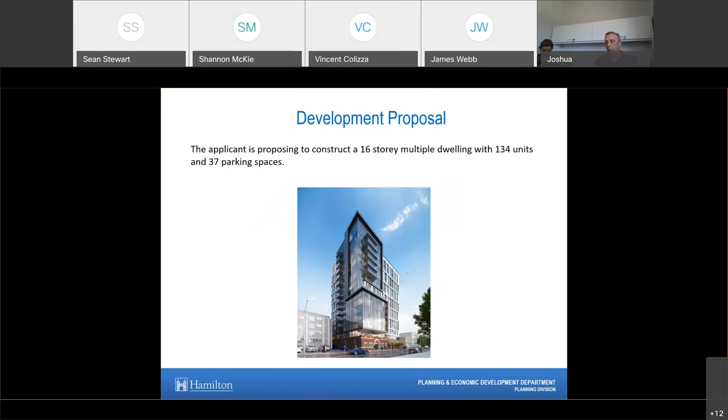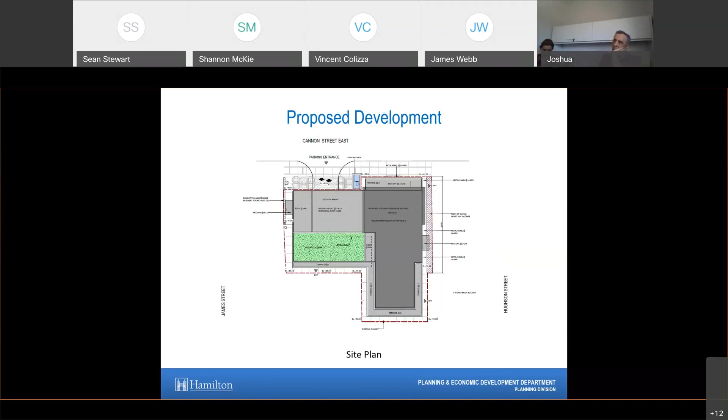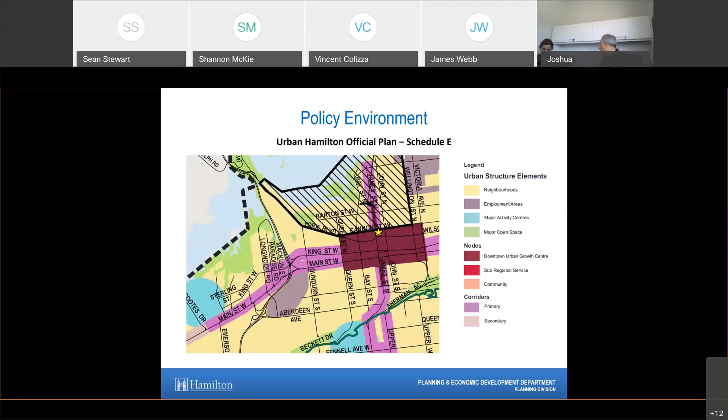Policy environment: on Schedule E of the Urban Hamilton Official Plan, the property is located within the Downtown Urban Growth Center. On Schedule E1, it's located within the Downtown Mixed Use Area. Some major policy themes: the Downtown Urban Growth Center shall be the preeminent node in Hamilton due to its scale, density, range of uses, function, and identity.

It shall be planned for a range of uses appropriate to its role as the city's preeminent node. It shall function as a residential neighborhood with a large and diverse population and a range of housing types. In the downtown mixed-use area, it shall serve as the central focus for the city by creating a sense of place. A higher density form of housing shall be encouraged that may be integrated with business uses, including retail and service commercial establishments on the ground floor.

Some key urban design policies: respecting existing character, development patterns, built form, and landscapes; promoting quality design consistent with the locale and surrounding environment; contributing to the character and ambience of the community through appropriate design of streetscapes and amenity areas; massing development to respect existing and planned street proportions; designing new development to minimize impact on neighboring buildings; and creating a comfortable pedestrian environment.

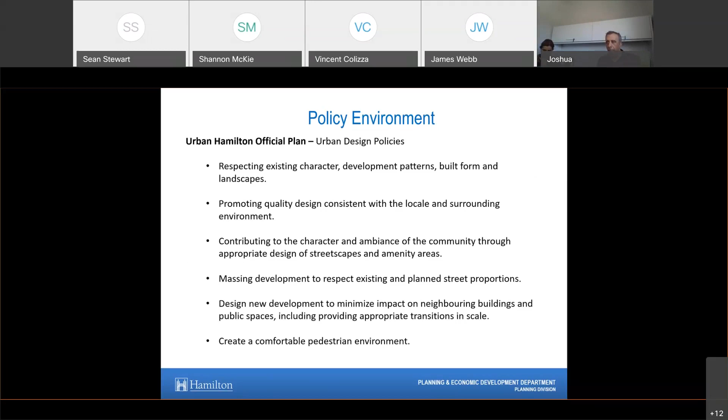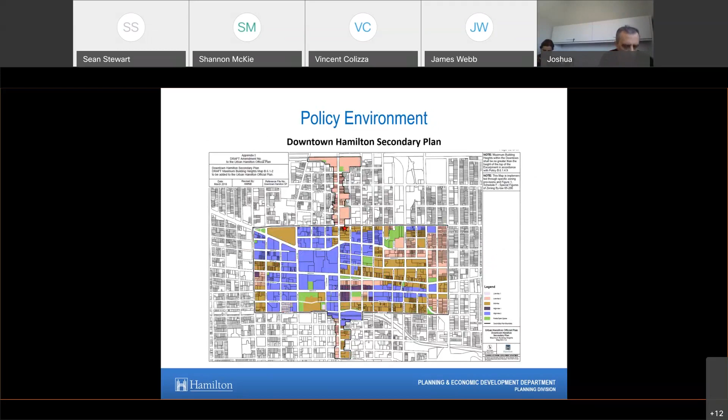The property is also located within the Downtown Hamilton Secondary Plan, within the Downtown Mixed Use designation, and it's also within the mid-rise category. Some major policy themes here: the downtown mixed use supports intensive urban scale mixed use development. Mid-rise buildings include anything greater than 6 stories, but not greater than 12 stories in height.

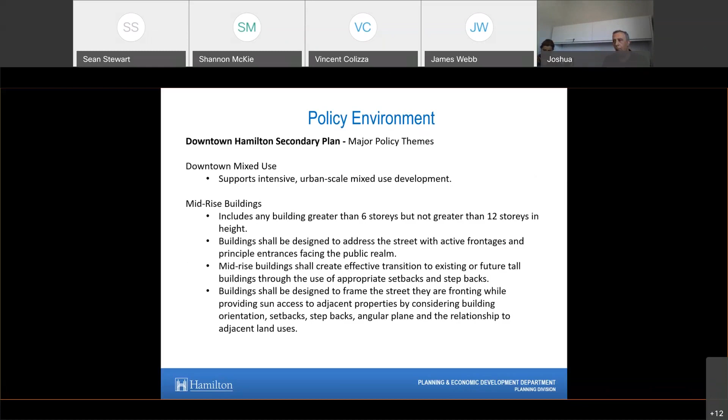Buildings shall be designed to address the street with active frontages and principal entrances facing the public realm. Mid-rise buildings shall create effective transition to existing or future tall buildings through the use of appropriate setbacks and stepbacks. And buildings shall be designed to frame the street they are fronting while providing sun access to adjacent properties, through considering building orientation, stepbacks, angular plane, and the relationship to adjacent land uses.

Some key urban design themes: development shall provide for transition and scale through a variety of design methods, including angular planes, location and orientation of buildings, and setbacks and stepbacks of building mass. Development shall allow for a minimum of 3 hours of sun coverage between 10 a.m. and 4 p.m., as measured on March 21st and September 21st, on public sidewalks and other amenity areas.

New development shall be compatible with on-site and adjacent cultural heritage resources. Adaptive reuse will be given priority for all built heritage resources. And all development shall be massed to frame streets in a way that respects adjacent street proportions.

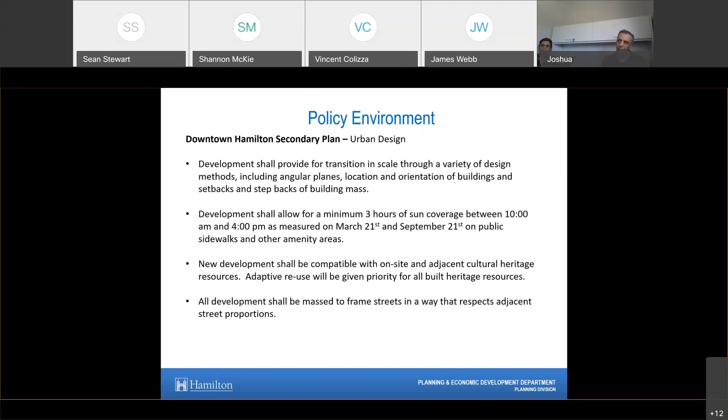Some regulations to note: maximum building height 44 meters, maximum lot coverage 85%, building base facade height 22 meters along Cannon Street East, minimum 3 meter step back above the building base facade height, and a minimum 3 meter step back for any portion of the building exceeding 22 meters from any side or rear lot line.

Some specific areas of discussion that staff would appreciate consideration of: Does the proposal complement the existing massing patterns, rhythm, character, color, and surrounding context? Does the proposal define the street through consistent setbacks and building elevations? And does the proposal conserve and respect the existing built heritage features of the area?

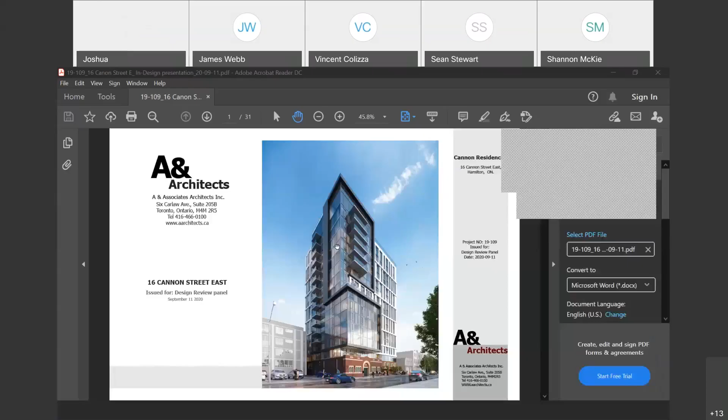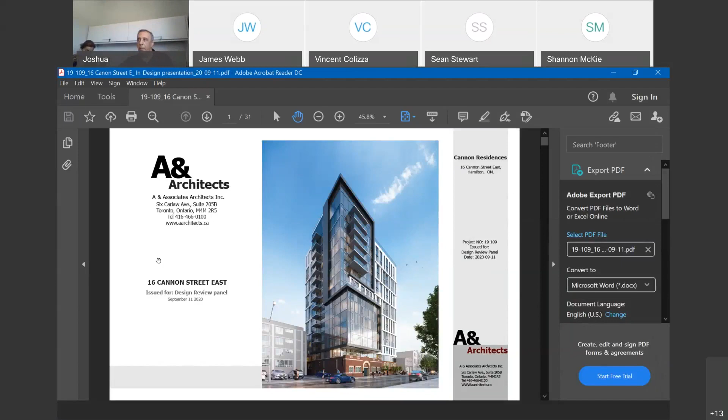Just the location and preliminary discussion about the location of the building, because we had all of that information from the previous presentation. I'll go directly to the plan.

In our project, we try to keep it as our advantage and make the building look similar to what we had in the past, while also having a better project. Because of this, we try not to change the entrance to the building, so we changed the direction, the access to the lobby, from the west side of the project.

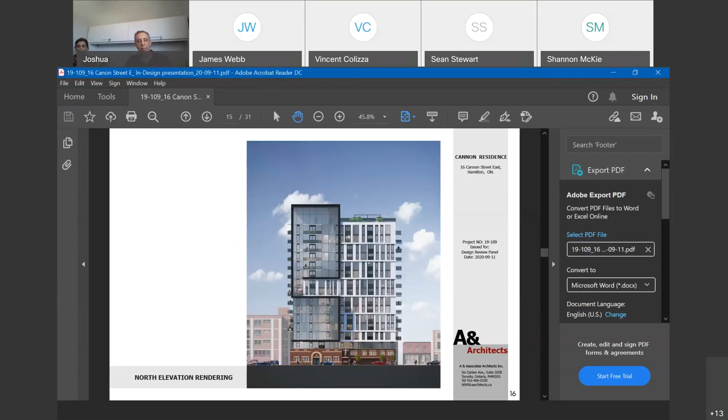I think the main portion of our design discussion is the heritage wall. The podium lines up with this, and we use the same material. We don't want to mimic exactly what's there, but we try to use the same colors and materials to create a great podium for this project.

On level 3, we have a glass portion that acts as a reveal between the podium and the tower portion of the building. We intend to use tinted glass at this level to emphasize the separation between the podium and the tower.

The other design trick we use is lighter material above the heritage portion. If I go to this image, you can see how we use even more reflective glass in this area, which makes the building appear a little lighter above the heritage portion.

In our opinion, this helps emphasize the heritage building and creates separation between the two portions of the building. For the rest of the building, we use a window wall system plus some metal panels with varying patterns. These metal panels also help reduce the size of glass in the elevations and provide a better R-value in the envelope system, which again helps with the sustainability of the project.

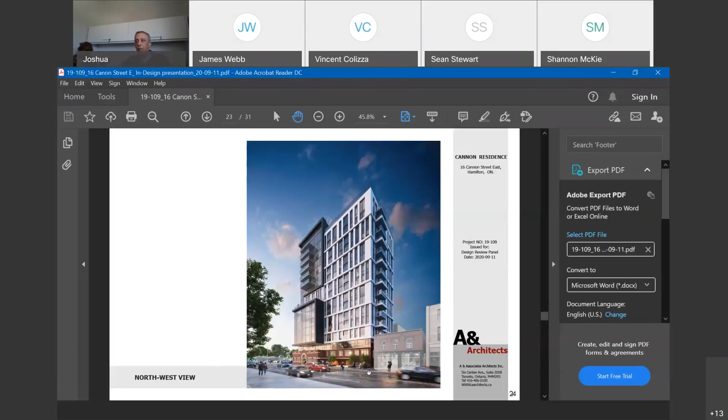This image shows the building looking west from Cannon Street. The next image is from the same street, but looking east. We provided shadow studies for this project as per City of Hamilton standards, and I believe we've covered everything in 10 minutes. If there are any questions or comments, by all means.

Vince, are you there? Yes, sorry. Thank you, it was a good presentation. At this time, we'll ask each panel member to ask some questions, starting with Robert. Thanks, the presentation was very helpful.

First question: since you had the shadow study up a second ago, and I heard in the first presentation that there's a requirement for three hours of sunlight on the surrounding sidewalks, do those shadow studies show that this has in fact been met? Do I need to share my screen again?

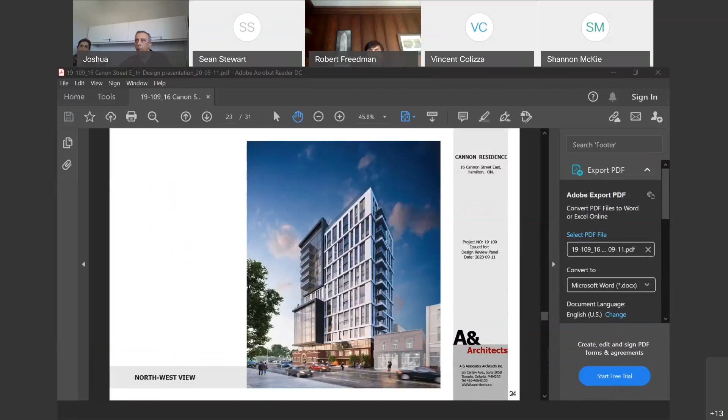Okay, so this is June 21st, Robert. I believe you're asking about the shadow on Cannon Street. Yes, so as you see in the project, the building is right at the property line, and we will have some shadow on the street. The west portion of the building has a little setback from the street, but we still provide shadow on the street. As you can see, the site is very tight, and we have to work with that.

Okay, and then the second question has to do with the timing of your application in relation to the city's tall building design guidelines. Was this before or after those guidelines came into effect?

Franz, can you help us on this one? The tall building guidelines on this particular property were in force and effect prior to the submission of this application to the DRP. Okay, thanks.

Is that it, Robert? Yeah, that's my question. Great. Okay, so Ute.

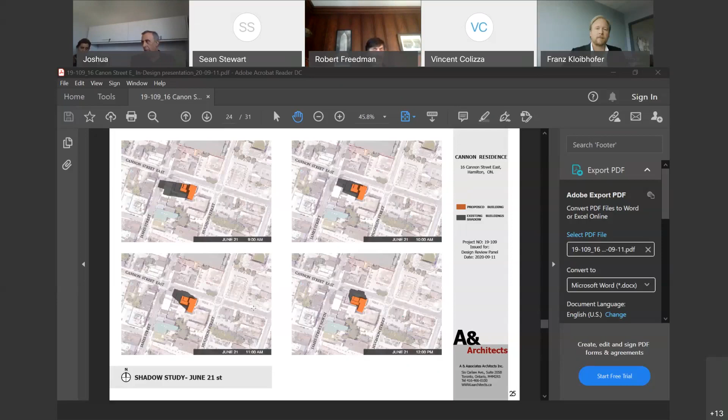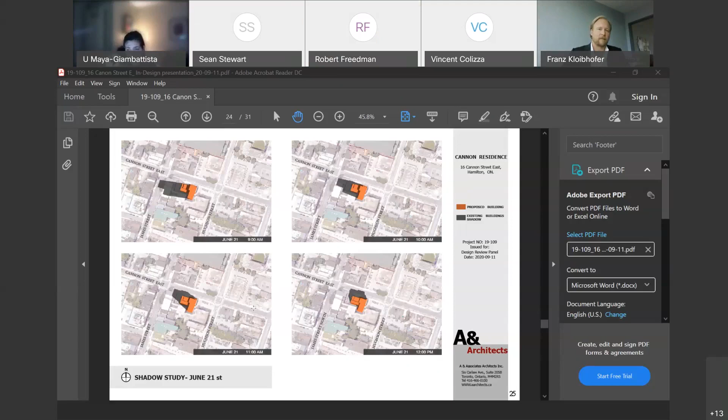My question is more related to the space between the proposed building and the existing building. Can you walk us through whether that space is open for pedestrian circulation, and what's the relationship with the surrounding envelope of buildings, and how the setbacks between buildings and windows is really the rationale for how you separate the different buildings?

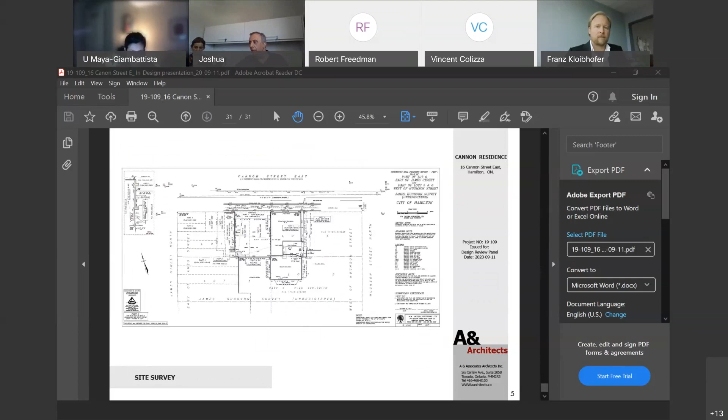So at first floor, we have a little bit less space between our building and the existing building. If you go back to the survey drawing, you can see the south building is built right on the property line. So in first floor, we just provided space enough for exiting and also to provide function, but in reality nobody's supposed to use that space during regular hours. We just have 2 exits for this area, for the back.

In this level, in first floor, the building stops at lower than the window of the existing building. After second floor, we have 3 meter setbacks all around the buildings and 2.5 meters on this building, and we kept these 3 meters all the way to the last floor. So there's always 3 meters of space between our building and the neighboring building.

In second floor, even if we have some sort of truss, again, this is an inaccessible truss, nobody can use it, so that 3 meter thing doesn't change. In other levels, that 3 meters is also kept from our property line.

So I just want to clarify the one comment there from Aliuta. On the ground floor, the highest point of the elevation of that first floor is below any windowsill elevation on the neighboring building to the south, so we're not walling up any windows if that's what you are concerned about.

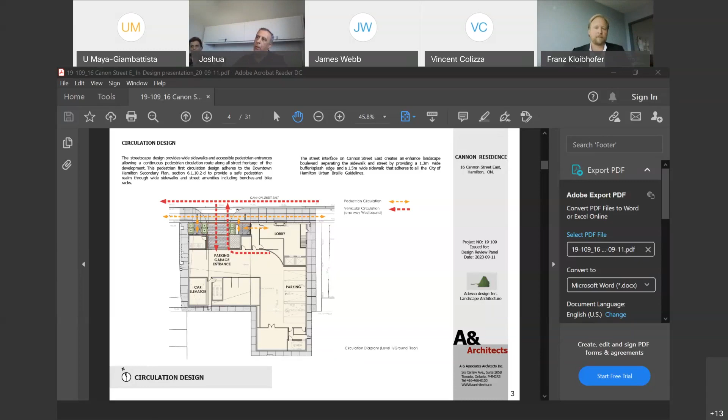So I guess the question to the designers is, help me understand the design rationale for the lower stories of this building, what essentially is that skin that you're retaining and that podium, sorry. Help me understand how that makes a positive contribution to the streetscape. Here's that you've retained that skin, but you've then got a recess immediately above it, and it's hard to tell if that's a 1 or 2 story building height. So just, again, more to your design philosophy, how this has evolved. Help us understand how you've developed the podium portion of the building transitions to the upper stories.

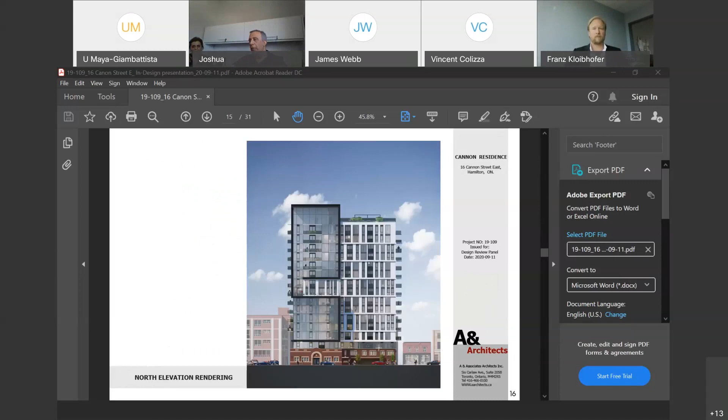As I mentioned, we have a podium, and we have to make a separation between the podium from the top. To emphasize that podium portion, we had a small setback on the third floor, and we separated the tower from the podium portion with the glass portion. I think that's the whole reason to keep the character of the existing building, and even when we add something new, it's still compatible with each other. At the same time, we don't want to jeopardize the existing facade.

I'm not sure if that answered your question, or if you have more clarification needed.

I'm just trying to understand the transition, because you're retaining the skin on the left-hand side. To the right, towards James Street, you're trying to replicate at least the materiality in the window. So when I read the Heritage Impact Assessment, it says emphasis shall be given to replicate at least a 2 to 3 story podium that respects in part the existing skin of the building being retained. So help me understand that transition as it relates to adding that full level of glass immediately above that. Do you see that as part of the podium, or is that the immediate transition to the building? The glass is, as I told you, just a separation. It's not the podium, it's the transition between those two sections of the building.

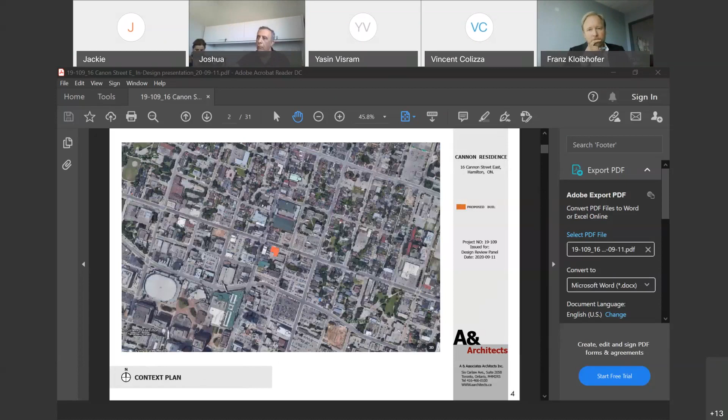Can anybody from your side or the city side speak to what's coming up on that? I can, yeah, I can speak to that.

Go ahead, to make it clear to you, Yasin: the building fronting onto Hughson Street at 127 Hughson is the former Firth Brothers manufacturing facility. That has just recently, within the last month or two, maybe longer, been protected under Part 4 of the Ontario Heritage Act. That's the entire building, as far as I understand, wrapping around us on the south. To the immediate east, at the corner of Hughson and Cannon, we have a small piece of property approximately 14 to 18 meters in depth across the entire frontage along Cannon Street, which is being used as a parking lot for 127 Hughson. Immediately to our west, where the Burnt Tongue restaurant is, that building is currently on the heritage inventory. The buildings beyond that to the west fronting onto James Street are on the Municipal Heritage Registry at this point. So the likelihood that the properties surrounding the subject lands will be developed in the future is slim. I'm not saying impossible, but it's very unlikely there would be feasibility to develop those other properties in the future.

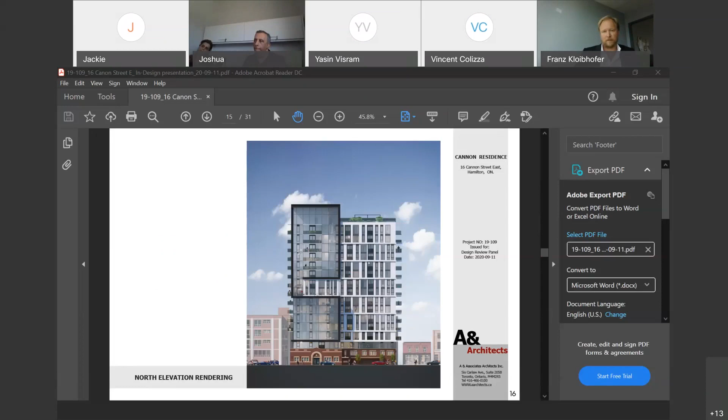Is there an amenity space on one of the floors? I don't see it. On the second floor, we have an amenity in this area. And at the roof, we have a small indoor amenity, which serves the outdoor amenity we have at the roof.

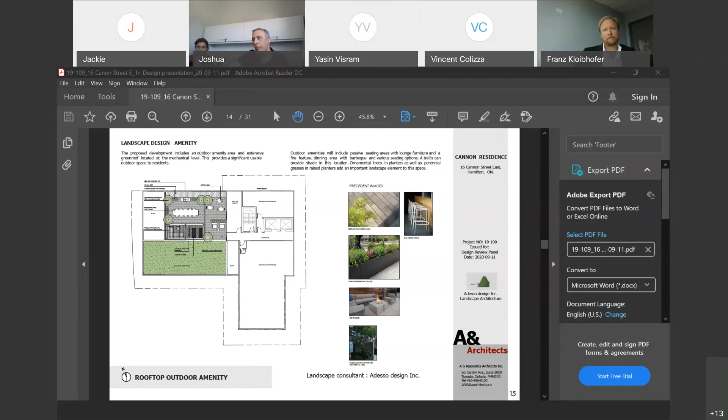Could you explain your material strategy, the kind of materials you're planning to use, and how you thought about the materials in terms of the surroundings and the composition and design? The external materials, as we discussed, the base for parking is just brick, and it will be matched with the existing facade. The rest of the building will be a window wall system combined with a metal panel system, and we try to make it completely different from the podium to emphasize the podium, while keeping the character of the building and the facade.

Okay, I'll leave it at that. Thank you, Yancy.

Tim? Thanks, Vince. Question, I guess, for Franz or Sean. I just want to be clear on the variances that are required for this development, specifically with respect to setbacks.

Certainly. So the variances we're looking at: the first one would be for maximum lot coverage. We're going to need a half percentage increase in lot coverage, from 85% to 85.5%.

On the north lot line against Cannon Street, we're required to provide a 3 meter setback above the 22 meter line. We're proposing 2.96 meters, so a very small variance for the front lot line where the original historic facade is. We'll also require an additional variance only because the property jogs to the south as it goes west, providing a zero setback there. But in terms of its relationship to the street line, that setback is in excess of 3 meters at that point when you consider the actual line of the front of the property against that historic facade.

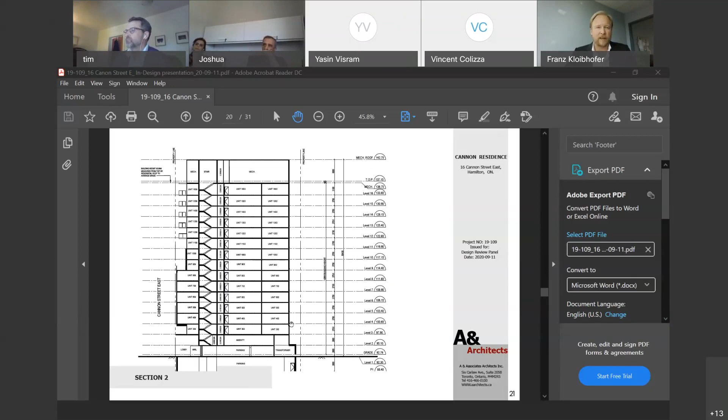So I'll speak to the planning side of that, in terms of the setback. At the front lot line, a zero setback is permitted. However, above 22 meters, which on this drawing is about the 8th or 9th story, we're required to provide a 3 meter setback.

This is a good example in this drawing. For the portion of the property closest to Cannon Street, we're providing a 2.96 meter setback at that foremost portion of the property line, so 2.96 meters — a 4 centimeter difference from the full requirement. But on the western portion of the property where it jogs south, we are providing a 0 setback above 22 meters.

We think that's reasonable and supportable given the context of this site — the main portion of the building we're setting back from is closest to Cannon Street. We then set back for the entire footprint of that jog, which is 2.63 meters in depth on the eastern portion. However, it is technically a 0 setback on the western portion.

I guess this is directed to planning more than yourselves: if you have a 3-meter road widening and a heritage component that extends into that road widening, in what way does it permit the building above to not have to meet the 3 meters from above the heritage component right at the outset? Like, how does the 3-meter road widening not apply?

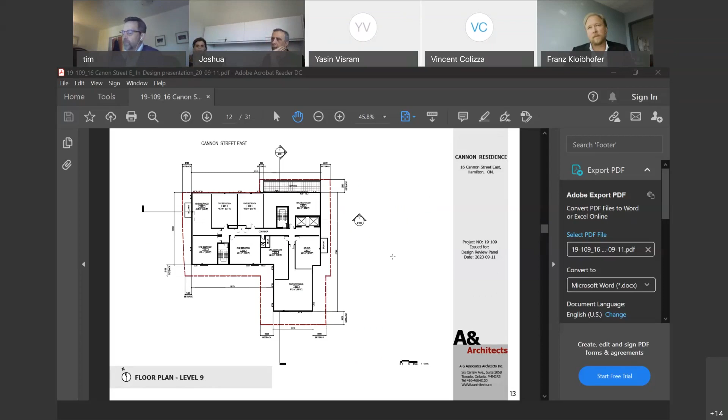I'm just wondering, under the bylaw, how a site with a road widening requirement is allowed to maintain the portion that encroaches into it, but I didn't know that the building above gains those rights too. I guess that's a question for planning, not yourselves, but the point I'm trying to make is that where I'm having difficulty with this scheme is that the massing of the building doesn't respect the heritage piece at the base as well as it could.

If you look at the portion of the building that's set back the full extent, it seems to have a better relationship to the base than the portion that projects out towards Cannon Street. That's an observation more than a question, but I was just wondering — I didn't know that legally you gain the rights over road widening above the portion of the building that happens to be heritage, because otherwise you wouldn't have that right.

If this was a road widening and this wasn't a heritage building, you'd have to meet the road widening setback. Well, I guess that's a question for planning. It's not really a question for you, but fair enough.

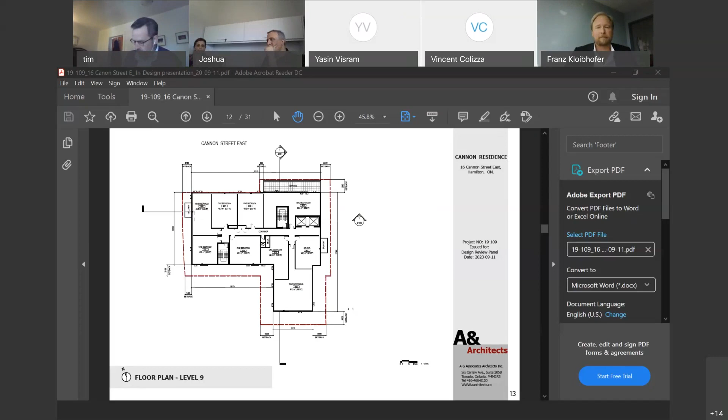So anyway, because later on I'll make some comments about how the base of the heritage building is somewhat okay, but it's having some difficulty with the upper body.

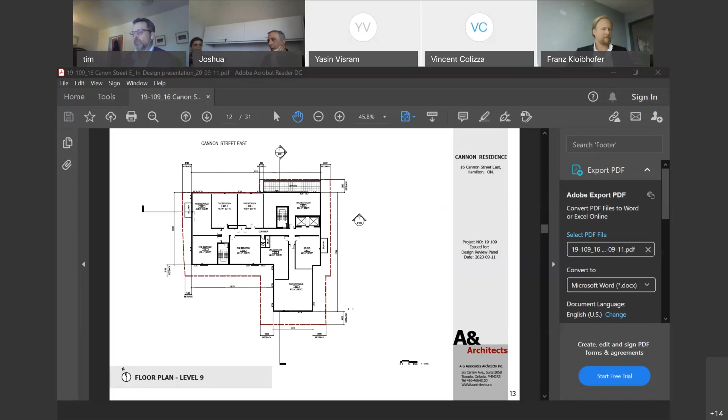Now, in terms of your setbacks around the perimeter, I see a lot of glass. Did you do your limiting distance calculations? Because you've got a high percentage of glass with some very shallow setbacks. We knew that from the first day we'd have this problem, so we will have to provide sprinkler windows for this project.

Yeah, I didn't hear your answer. I'm sorry, I'm saying we knew this was a problem, and we had this discussion with our team, and the answer is just providing the window sprinkler for this project.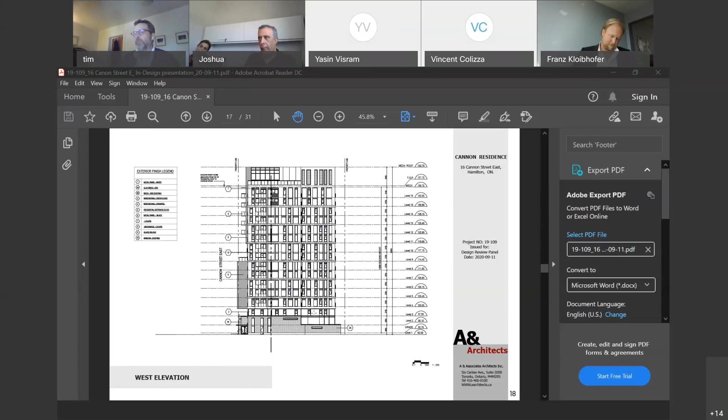So you're providing a greater percentage of unprotected openings. Now you're going to protect them so that you can have the extent of glass that you're proposing. Yes. Okay, and if you look at the drawing, the width of the units are that large, so the area can just manage it with the sprinkler window.

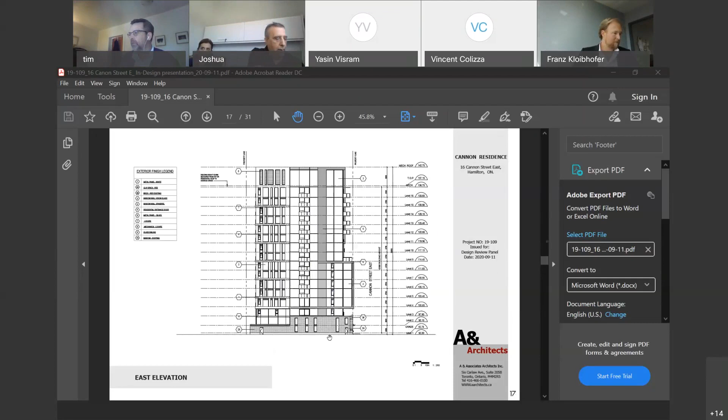Right, okay, and what is the size of your floor plate? The floor plate is, just give me one second. The upper portion of the building is something about 630 square meters. That's the largest plate or the smallest plate? Is largest, the largest.

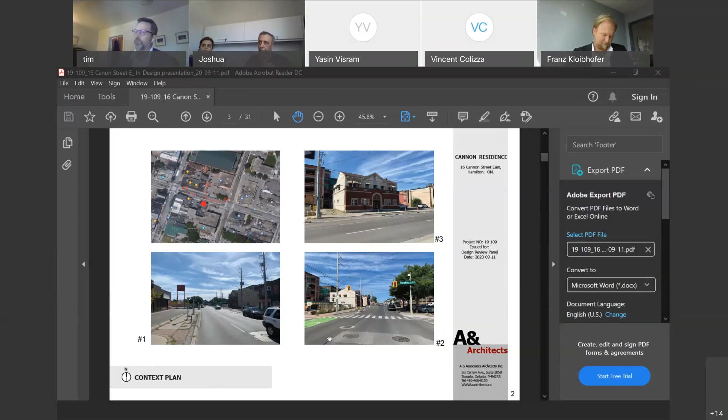Okay, that's all my questions. So we'll close the question and answer session and we'll open it up to panel advice. So we'll start with Robert.

Thanks, Vince. Again, thank you for the presentation. So my comments in some ways are going to be aimed, I'll try to direct this when they are aimed at the city. But let me open by saying that I think the view that's up on the screen right now is a good one.

In many ways, I find this a handsome building. I think it's been carefully thought out and conceived. And to put it somewhat in the abstract, if this were on a larger site, I think with a little bit of trimming and tucking, it could actually be quite a nice insertion into the area. Having said that, it's not on a larger site, it's on quite a small site.

And I can understand the approach you've taken given how the site is zoned in terms of permitted overall height and setbacks. But I asked the question at the beginning whether the tall building guidelines were in place when this was conceived, and it's clear that they were not, that the guidelines have been completely ignored. But I'll come back to that in a second.

So just looking at this view, I think the approach to heritage is a good start. I do think it's a handsome facade, and it's certainly an old building that will contribute to the overall heritage character in the area.

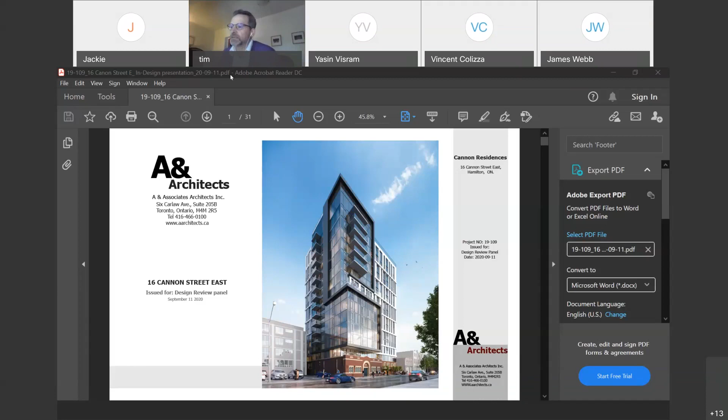Thank you, Yasin. Tim? Yeah, thanks, Vince. I will also echo all my colleagues' comments. This simply is not a big enough site for what you want to do on it. Unfortunately, it is really unfortunate that we have a real misalignment of policy, zoning, and guidelines here. But we're stuck with it, and this will be an issue with other sites—it already has been an issue on other sites. It's unfortunate, but we have to deal with it.

And presumably you're not going to go away and come back with a mid-rise building.

I want to try and make my comments constructive. I want to echo Yasin's comments about the brick piece west of the Heritage Building. I agree that it will give more attention to the Heritage Building if you just have a contemporary treatment there and not try to extend that brick facade over. There's no need to do that.

So what can we do with an overly bulky building that's going to be a landmark building in this area, which is wonderful from the developer's perspective, but from an urban design standpoint, this is not what's appropriate for this area. My question is, how can we make this a more subtle building? I don't disagree that the facades are well designed, but I don't agree that this is a good design for this site.

If we were in the core of downtown where we anticipated, or there were many other buildings of this height or taller, this architecture would be perfectly fine. It would fit right in. But here, for you to be more respectful of the heritage with a mass like this, there needs to be a lot more subtlety.

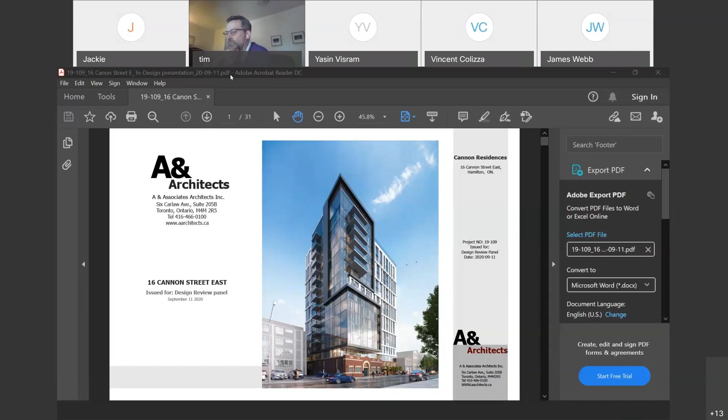That should give you a clue that you're on a property that's been somewhat overdeveloped. Granted, you increase the property value and get all the density you could fit, working within your as-of-right, but it doesn't fit within the context, and it doesn't address future development that would impact the building's value significantly, because if any neighboring development took the same approach, that building would have severe problems keeping its vacancy rates low, whether it's a rental or a condo.

So I think you need a rethink. Painful as it is, it gives you an opportunity by simply reducing the number of suites per floor, pulling in the facade over the heritage piece, and taking a really close look at your studio apartments with balconies projecting over that minimal setback. If there's a building across the way, it's going to be a real problem.

So as everyone has said, I won't repeat myself, but it's clear that the massing and scale of this development has to come down and be somewhat reduced in terms of the footprint on the upper floors.

There's a lot of attention to the upper body of this building and somewhat less attention to the base. I don't think you need the projection in the mid-body to the extent you're doing, and you'll have some issues with how to deal with that structurally.